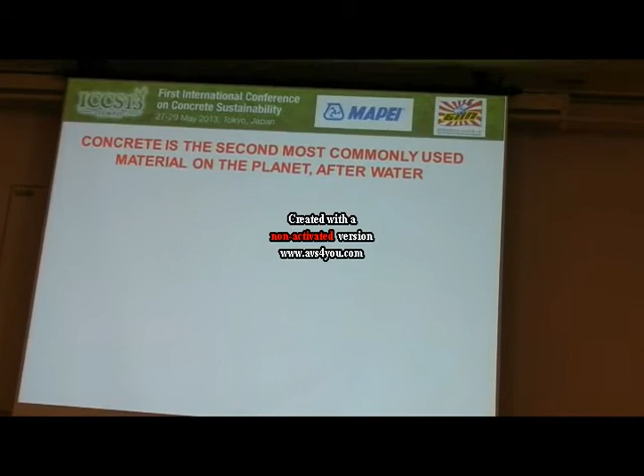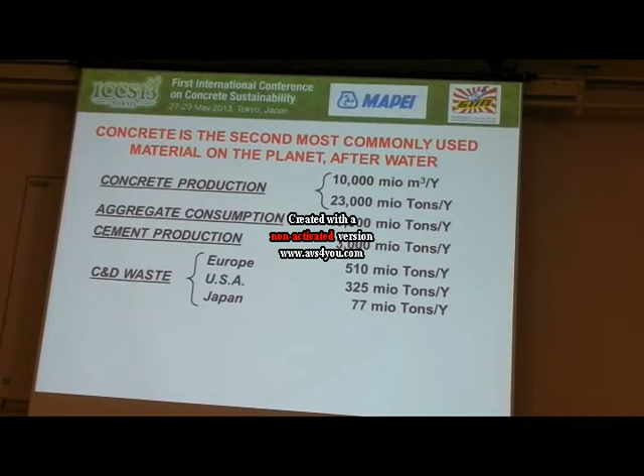Concrete is the second most commonly used material on the planet after water, and the production of concrete is globally huge. About 10,000 million cubic meters per year of concrete are produced. This means that huge amounts of raw materials are used for aggregate and cement, and also a lot of waste is produced. Among these wastes there is returned concrete.

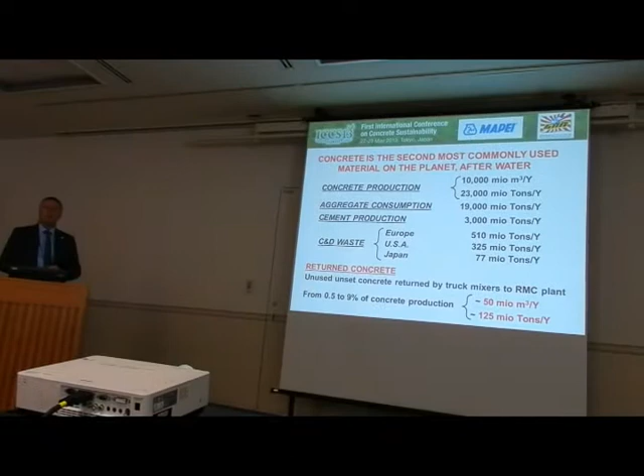Returned concrete is the unset, unused concrete which is returned by the truck mixer from the job site that, for any reason, is not placed and comes back to the ready-mix plant. In many cases this material can be a waste with many impacts from an environmental and economical point of view.

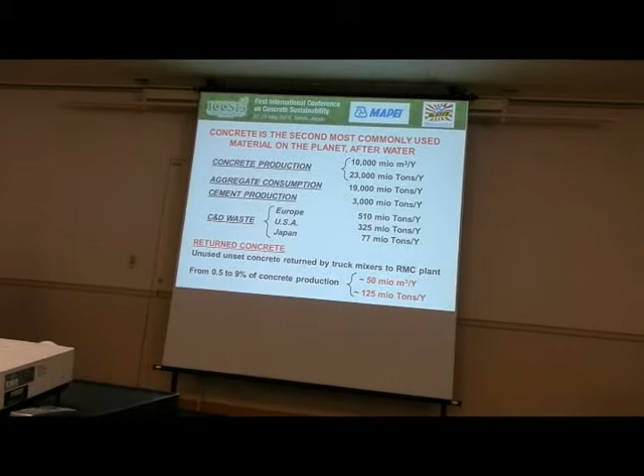In a conservative estimation, the global amount of returned concrete is above 100 million tons per year. That means more than double the amount of the total concrete production in Italy.

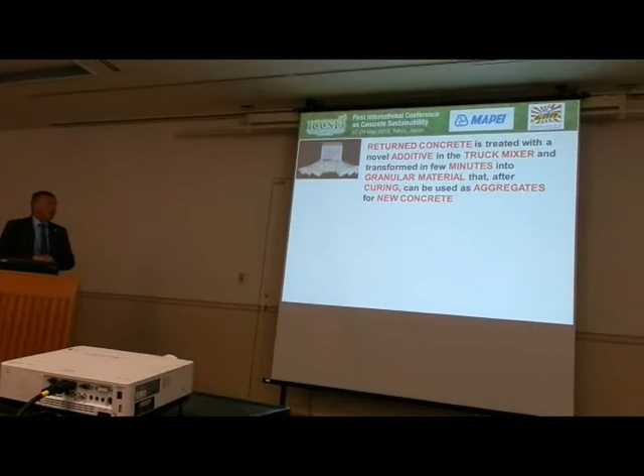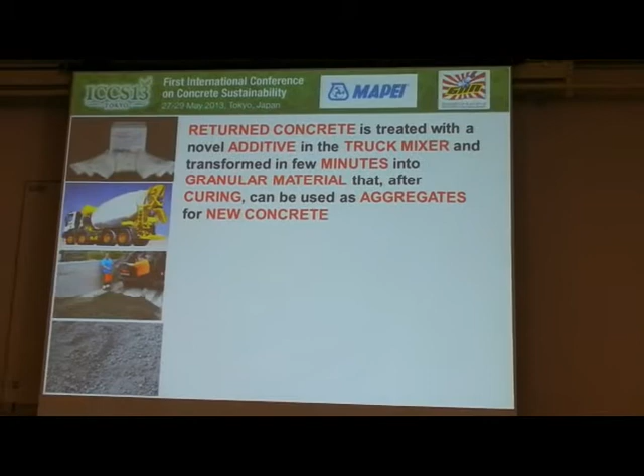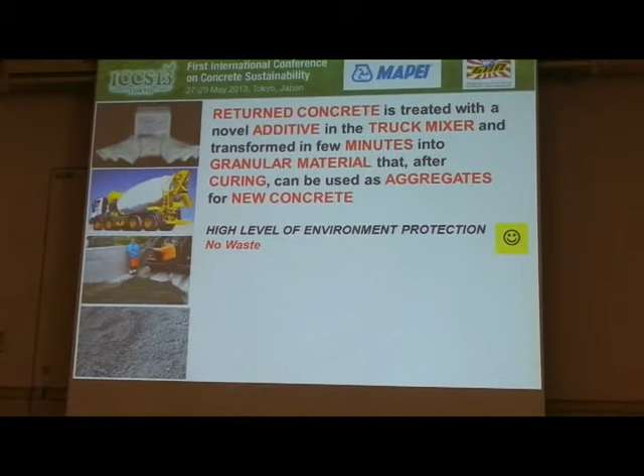With the new technology, returned concrete is treated with a novel additive in the truck mixer, and it is transformed in a few minutes into a granular material that, after curing, can be used as aggregate for the production of new concrete. This technology has many advantages because it's characterized by a high level of environmental protection, because no waste is produced.

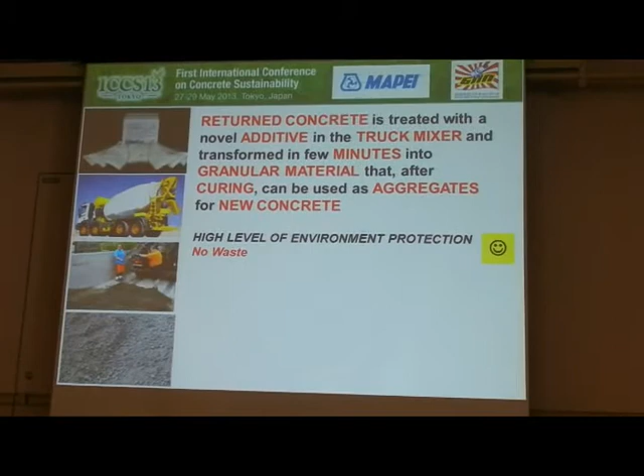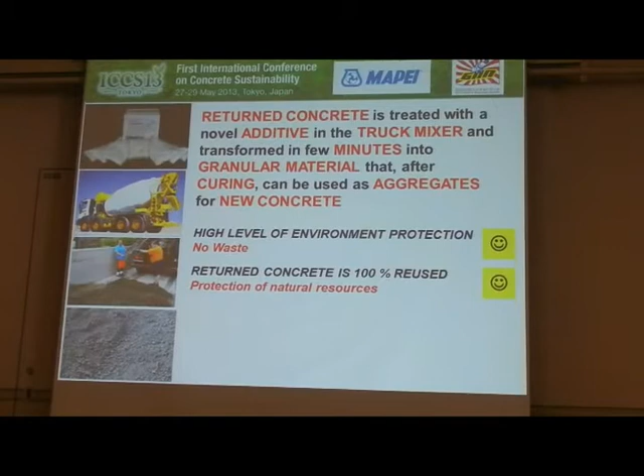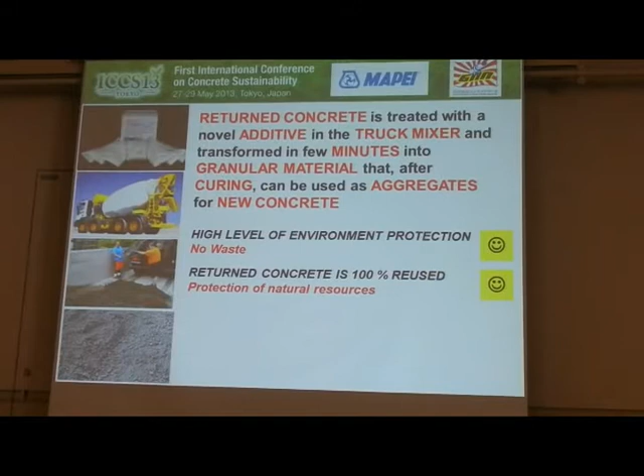The concrete is completely transformed into a new material, so no waste, no liquid, no solid are produced. The second advantage is that returned concrete is fully valued because it's reused 100%, and this allows saving of natural aggregate, so there is a protection of natural resources.

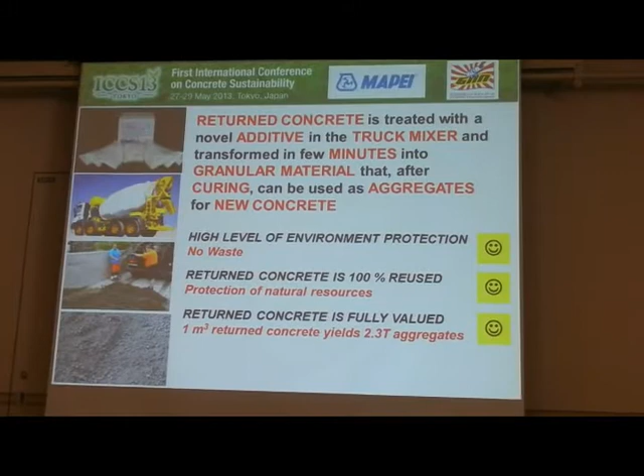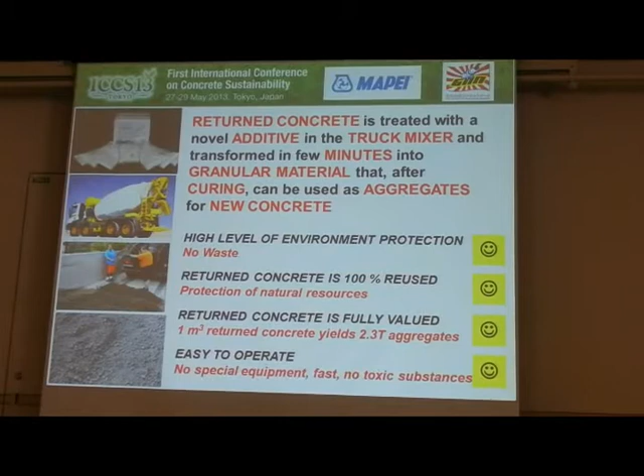From the economical point of view, 1 cubic meter of returned concrete is transformed into aggregate. This means that about 2.3 tons of aggregate are produced from 1 cubic meter of concrete. It's very easy to operate because it doesn't require any special equipment, as the process is operated directly inside the truck mixer, and it's very fast.

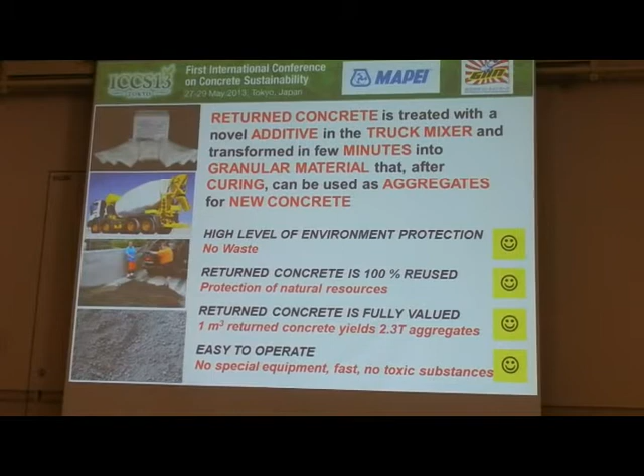The overall process takes less than 10 minutes, and the additives are not based on dangerous substances or toxic chemicals.

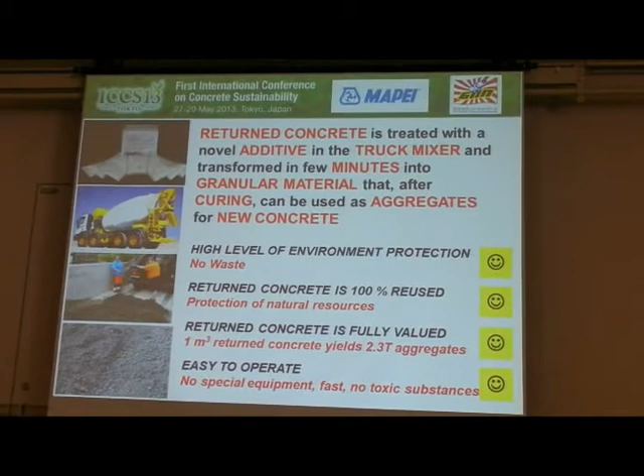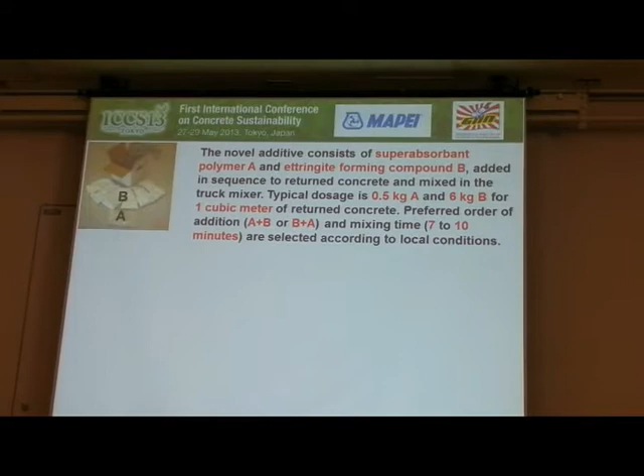The novel additive consists of a superabsorbent polymer, part A, which is in a water-soluble bag, and a component B, which is an ettringite-forming compound, that are added in sequence to returned concrete directly in the truck mixer and mixed together. The typical dosage is 0.5 kilogram of part A and 6 kilograms of part B per 1 cubic meter of returned concrete to be treated.

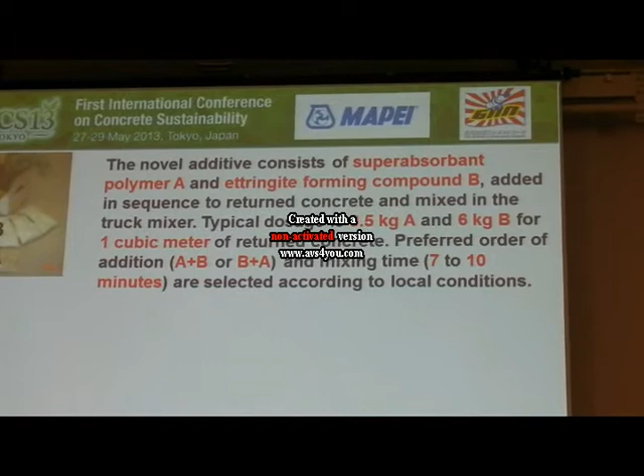The preferred order of addition may be first part A and then part B, or vice versa, first part B and then part A, according to local conditions. This means the type of cement, the water to cement ratio, and other variables.

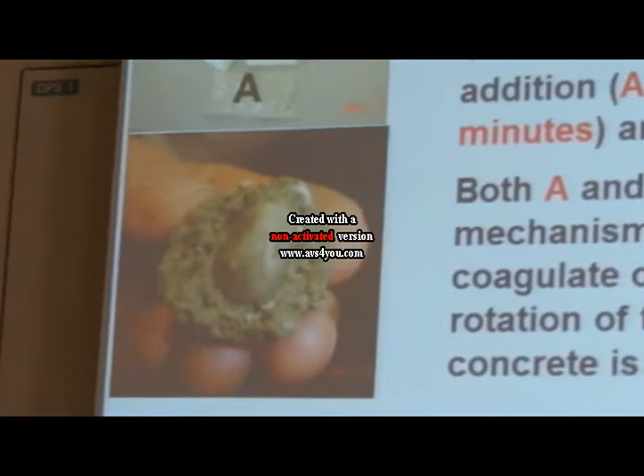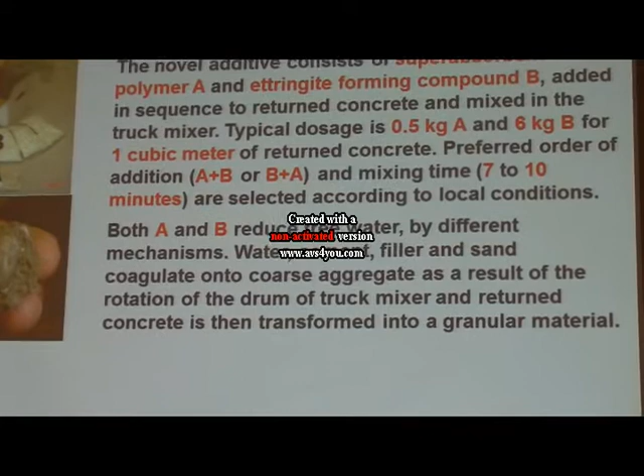Both component A and B act to reduce the free water, so they have the capability to absorb or consume free water, and they act by different mechanisms. The water, cement, filler, all the fine particles of the concrete coagulate onto the coarse aggregate as a result of the rotation of the drum of the truck mixer.

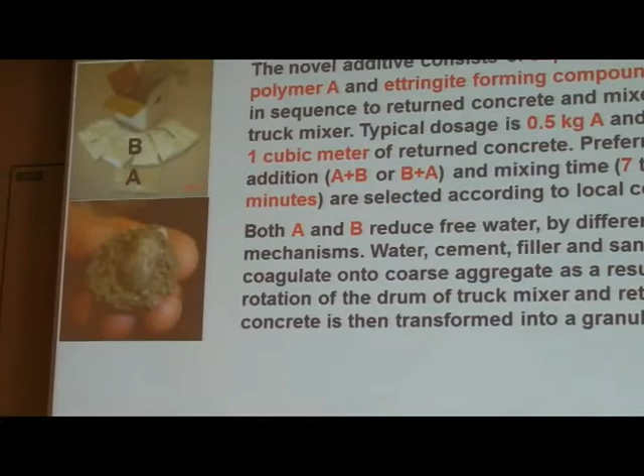Consequently, the returned concrete is transformed into granular material, like this example. You see there is the coarse aggregate inside as a core, and around it there is all the fine material, including water and cement, coagulated onto it.

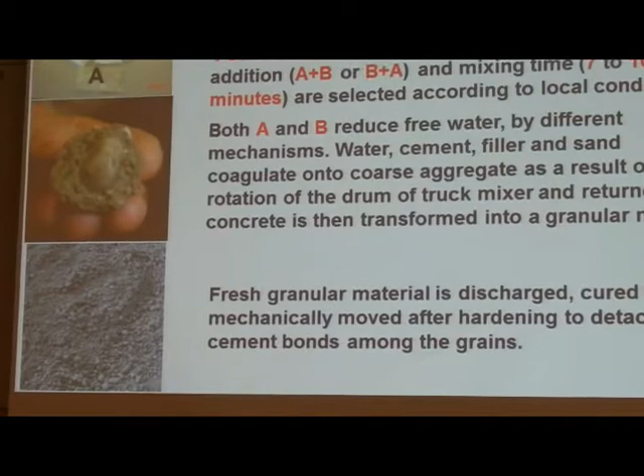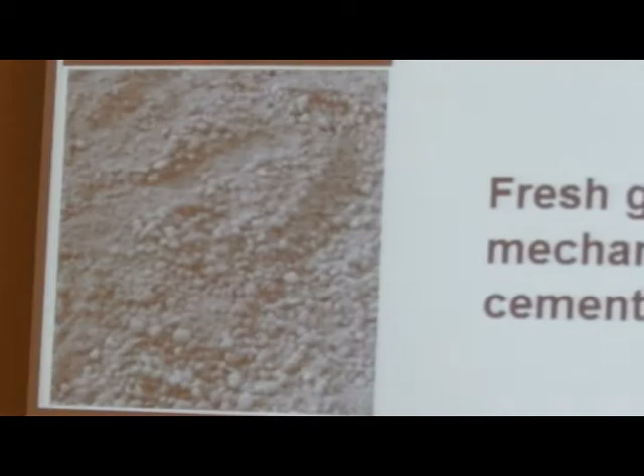After that, the material is discharged on the ground and let to harden as a normal cementitious material. The day after, it is gently moved by an excavator in order to detach the individual grains, giving again the final aggregate.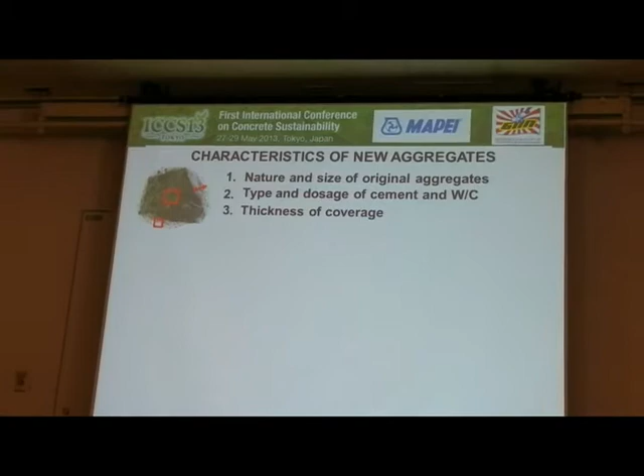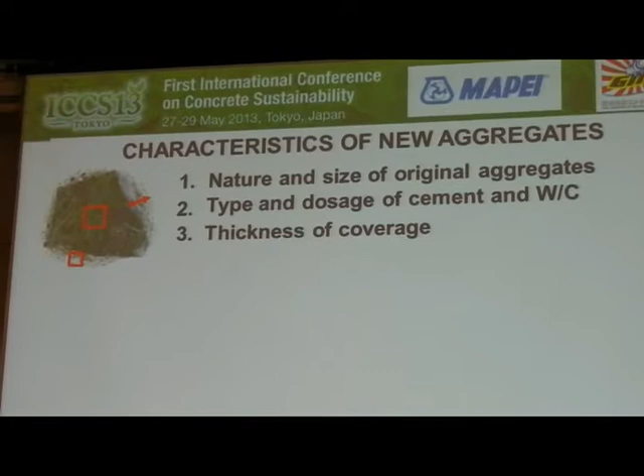Once the aggregates are obtained, they can be reused after some days for the production of new concrete. Of course, the characteristics of the new aggregate depend on the nature and size of the original aggregates, the type and dosage of cement, the water to cement ratio, and the thickness of the coverage.

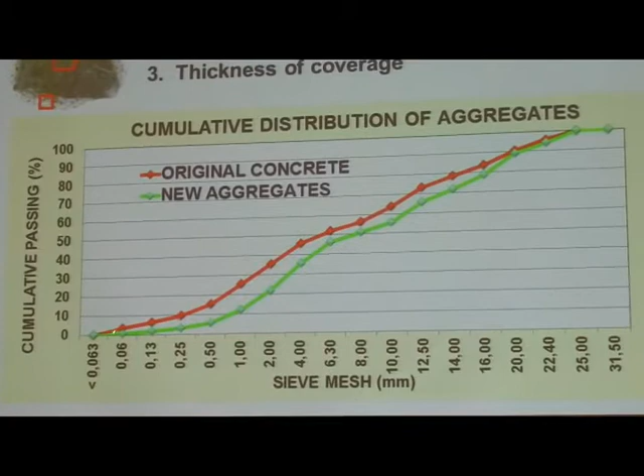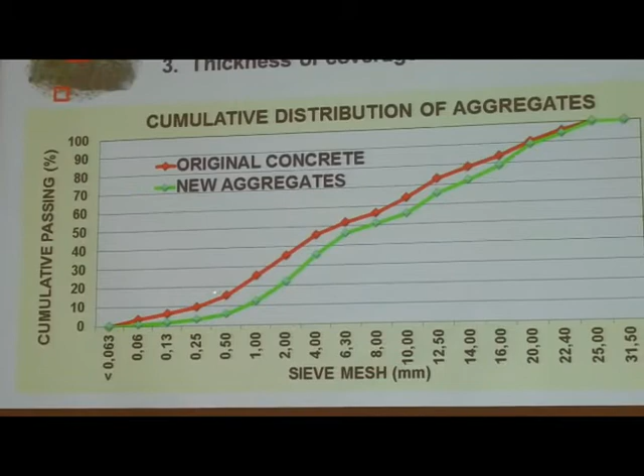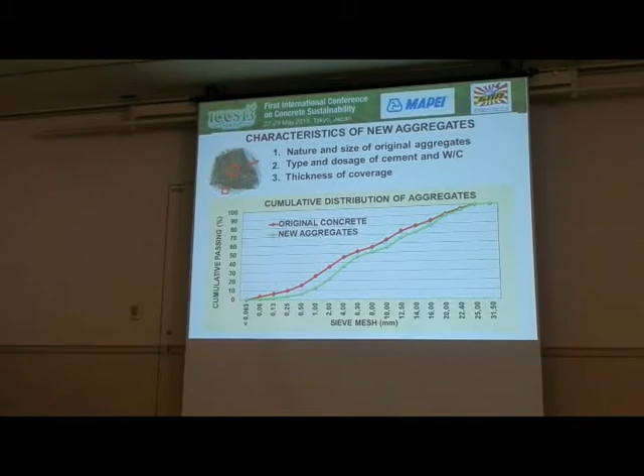The typical distribution of the new aggregate is represented in this graph. This is the original distribution curve of the aggregate in the returned concrete, and this is the typical distribution of the aggregate obtained from returned concrete after the treatment. You see that you have a lower fraction of fine material, because the fine material coagulates onto the coarse aggregate, so you have a lower amount of the fine fraction.

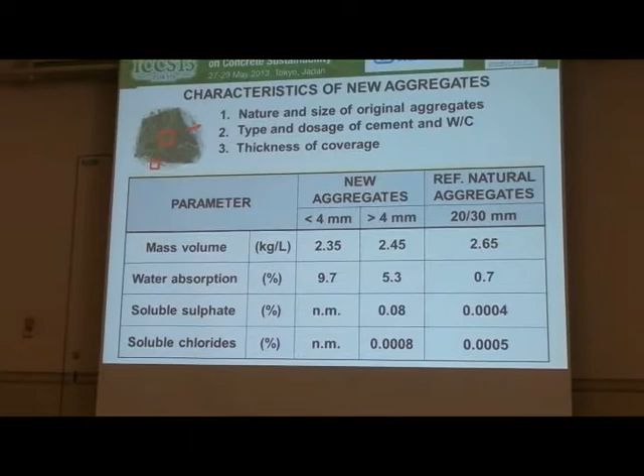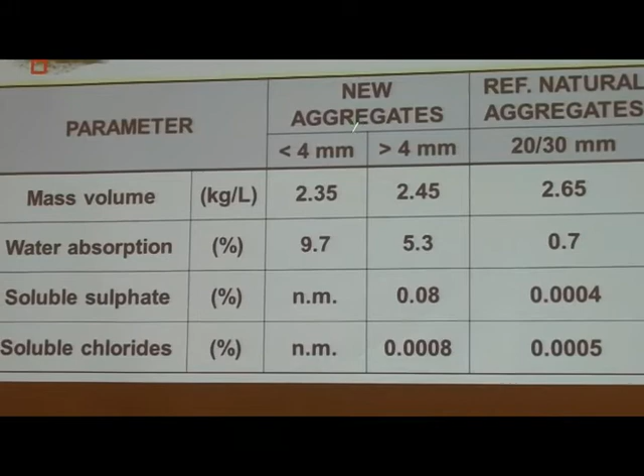Other physical and chemical characteristics of the new aggregate are a lower density, of course, because it's very similar to typical recycled aggregates, and higher water absorption. This is, of course, a function of the particle size.

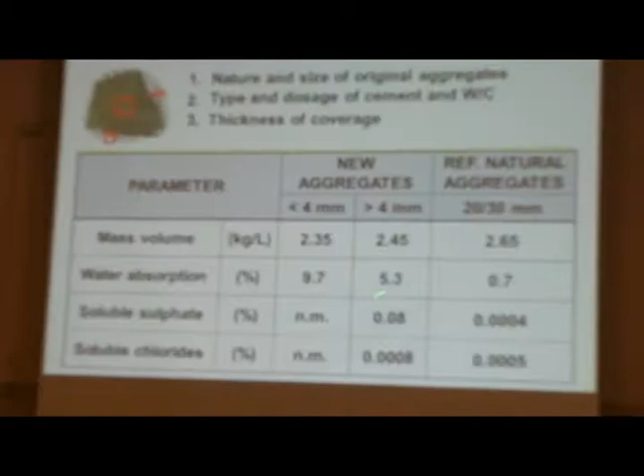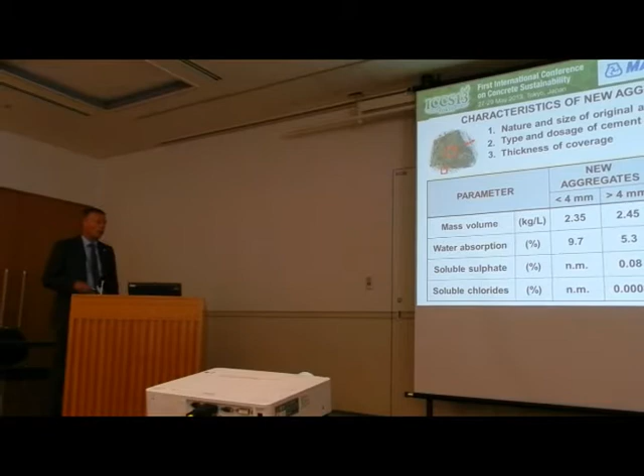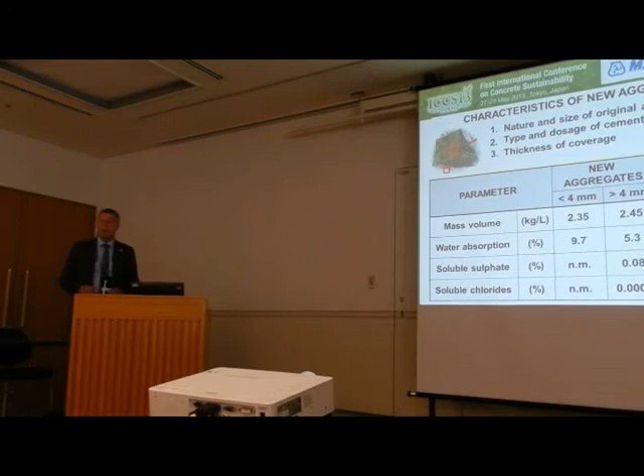Component B is based on sulfate, so the typical level of sulfate is increased compared to a natural aggregate, which has very low content of sulfate. By the way, the increase of sulfate content is not so high, and it is still quite below the technical standard, for instance as stated by the European technical standard. There is no increase of other components such as chloride.

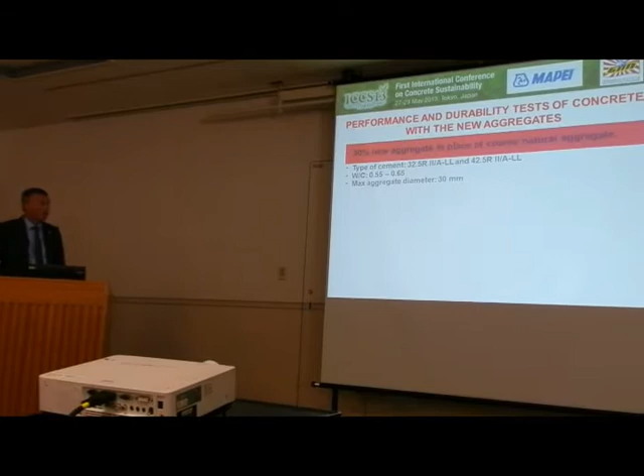What are the performance of the concrete made by using these aggregates? We made tests by substituting 30% of new aggregate in place of coarse natural aggregate. We used different Portland cement, from 32.5 to 42.5, and different water to cement ratios according to the test we did. In all the concrete, the maximum aggregate diameter was 30 millimeters.

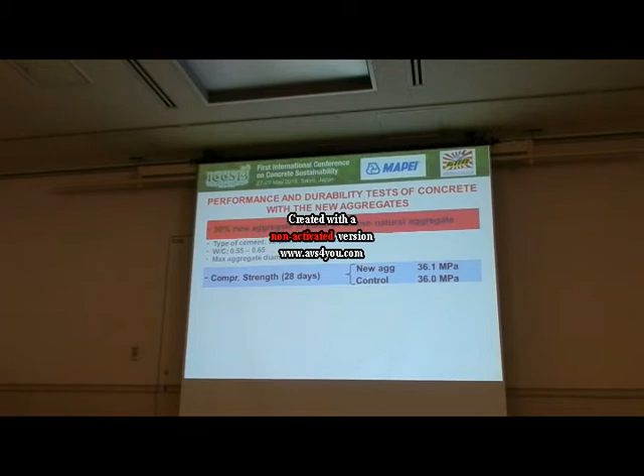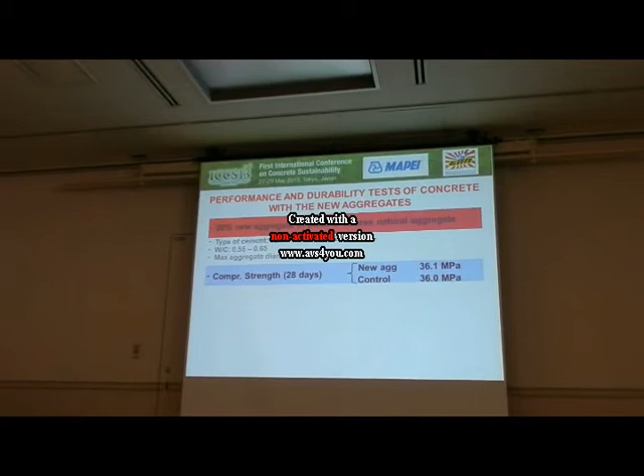We can see that there is no effect on compressive strength comparing the concrete made with 30% substitution of new aggregate in place of natural one, compared to the control. Control was a similar concrete but made with 100% natural aggregate.

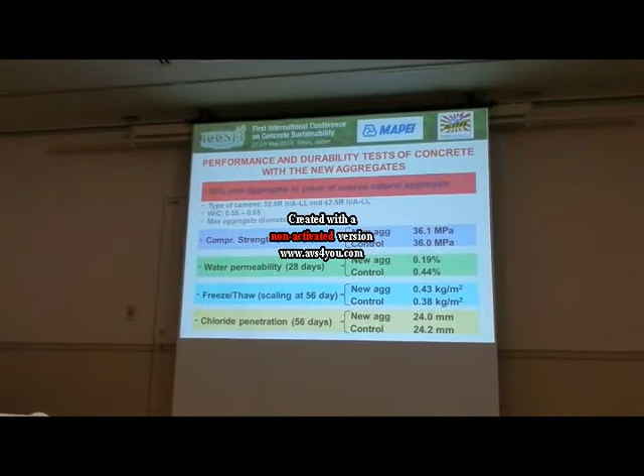Durability tests were also good. Particularly, water permeability was even better than the control concrete with natural aggregate. We are investigating deeply the reasons for this, and also the frost resistance was good, and chloride penetration too.

Now I leave the floor to Mr. Miyamoto, who continues the presentation about the application of the technology in Japan.

Good afternoon, ladies and gentlemen. My name is Mitsuya Miyamoto. I have the honor to represent GNN, a Japanese association of ready-mix concrete producers with over 45 RMC factories distributed all over Japan. The mission of GNN is improving concrete quality and sustainability through innovation, using new technologies and increasing recycling of materials.

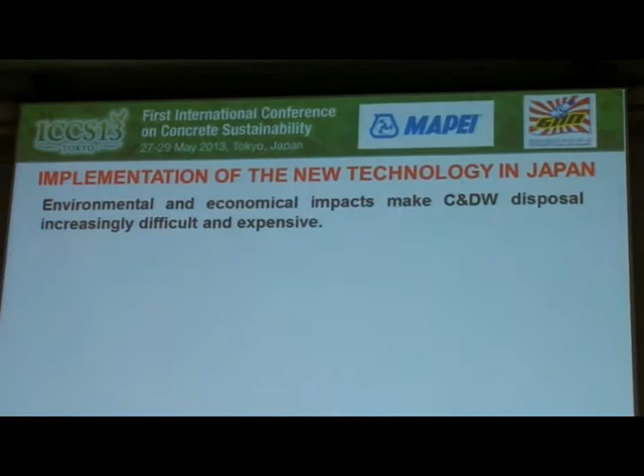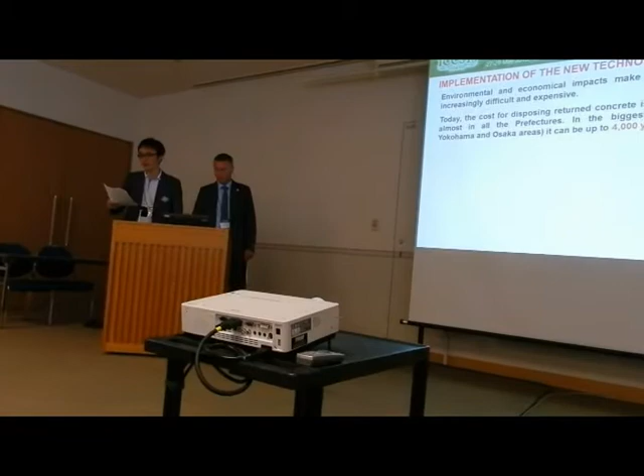Today, the disposal of construction and demolition waste is becoming increasingly difficult and expensive. In Japan, the cost for disposing returned concrete is quite high in almost all the prefectures. In the biggest cities like Tokyo, Osaka, and Yokohama, it can be up to 4,000 yen per cubic meter, equivalent to 30 euros per cubic meter.

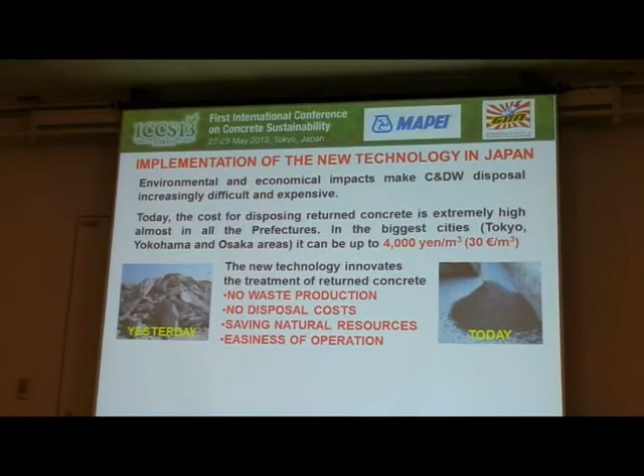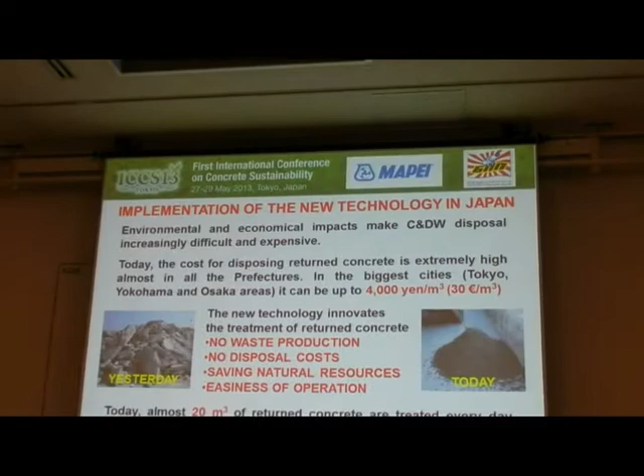We started last year a co-research project to implement the new technology for returned concrete in Japan. This technology represents a revolution compared to the past because it does not produce waste, cuts the cost of disposal, contributes to preserving natural resources, and it is very easy and safe to apply.

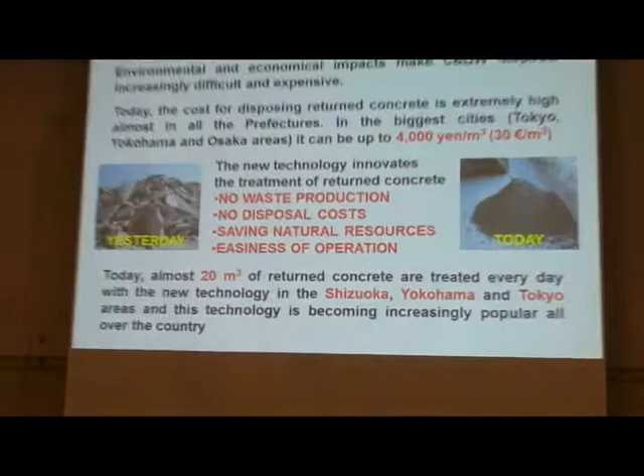Today, almost 20 cubic meters of returned concrete are treated every day with the new technology in the Shizuoka, Yokohama, and Tokyo areas, and its use is becoming increasingly popular all over Japan. It is soon really going to take off.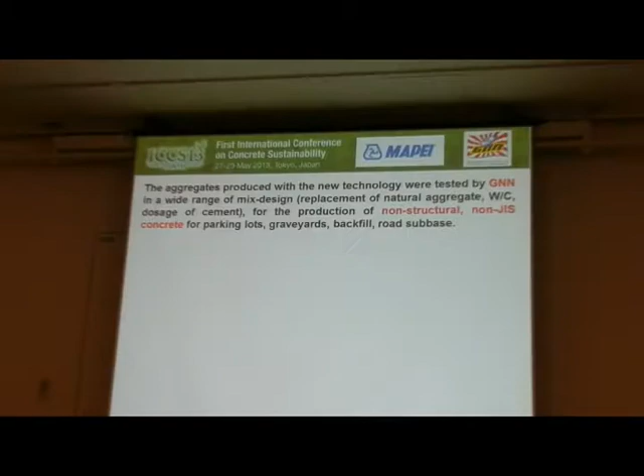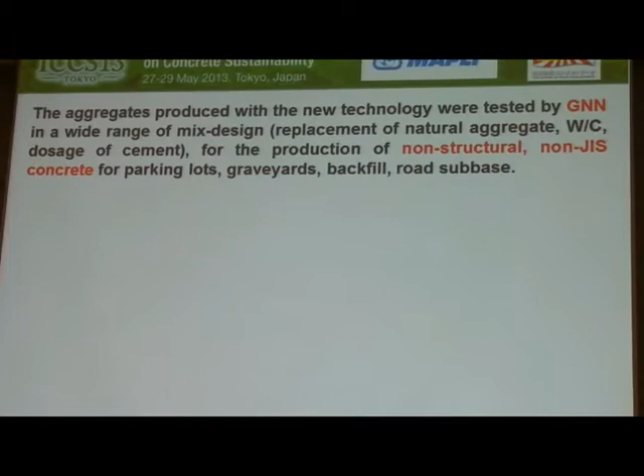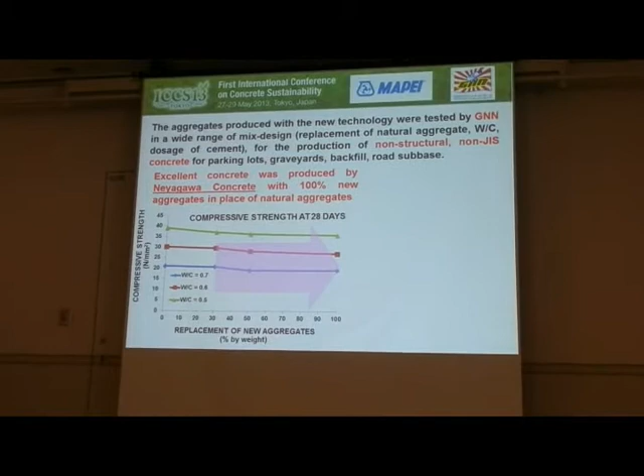The aggregates produced by the new technology have been tested by GNN in a wide range of conditions, for the production of non-structural, non-JIS concrete to be used in parking lots, graveyards, backfill, and road subbase. We, together with other GNN members, discovered that it was possible to obtain excellent performing concrete by using 100% of the new aggregates in place of the natural one.

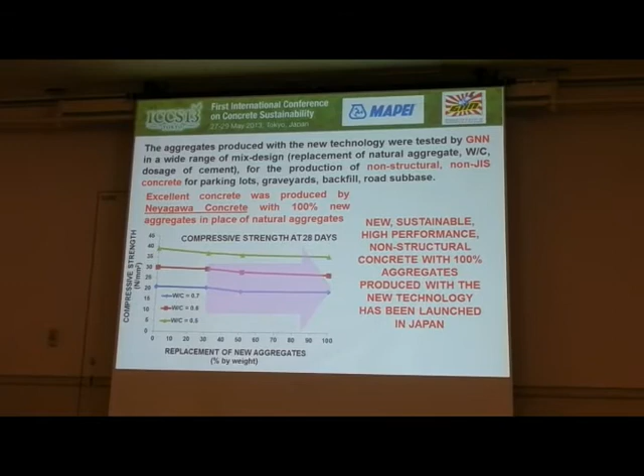After this discovery, a new sustainable, high-performance, non-structural concrete material with 100% new aggregates was launched in Japan. In the next slide, I will show you some examples.

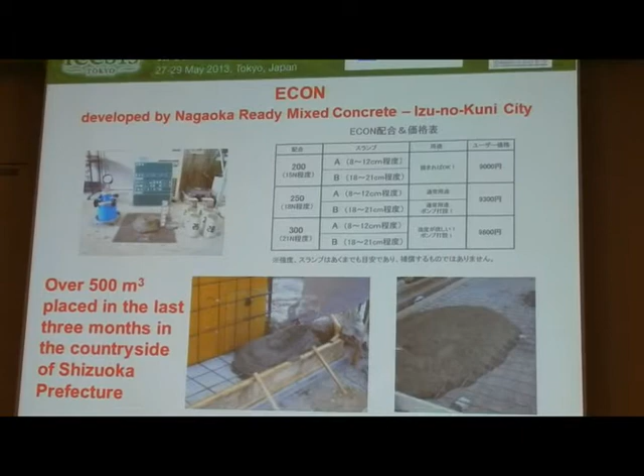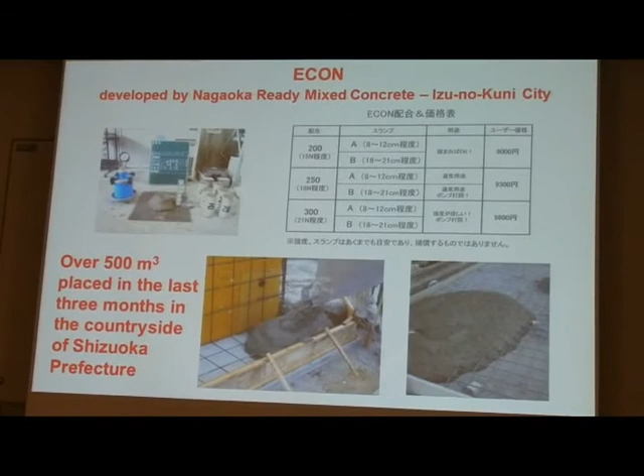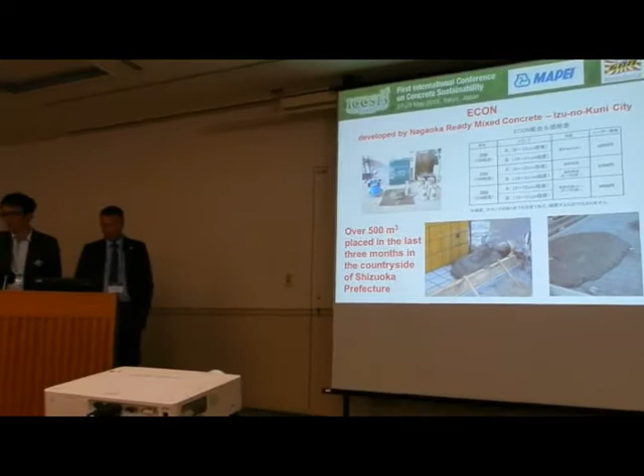Econ is a new concrete material based on 100% aggregates produced with the new technology. It has been developed by Nagaoka Ready Mixed Concrete, and it is available in 6 different types according to the class of strength and workability. Besides the excellent performance of Econ, thanks to its cheaper price, general contractors can save more than 30% cost compared to concrete produced with natural aggregates.

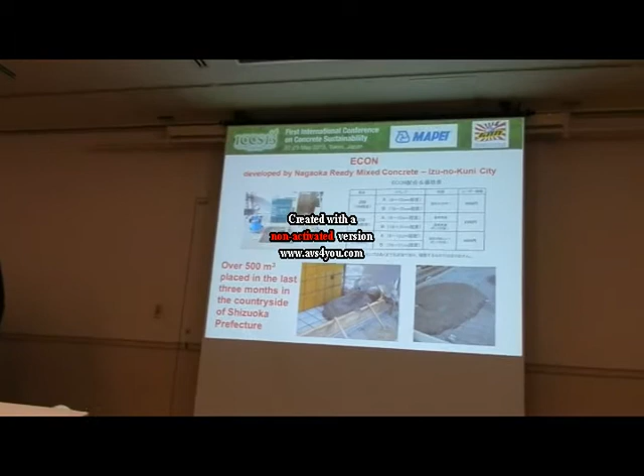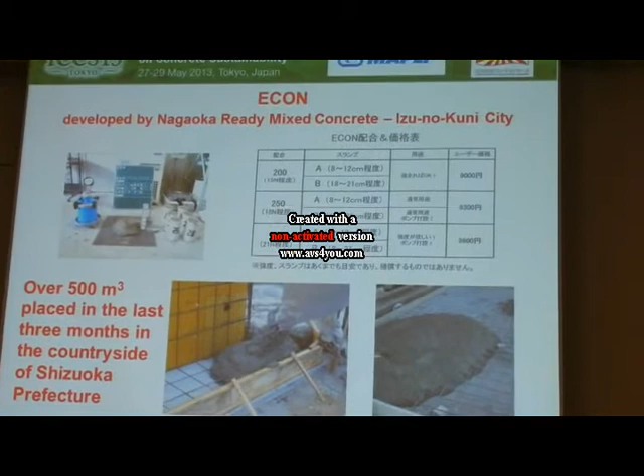For this reason, Econ is becoming increasingly popular in the Shizuoka area, and over 500 cubic meters have been placed in less than 3 months. Now we are placing Econ at more than 200 cubic meters a month.

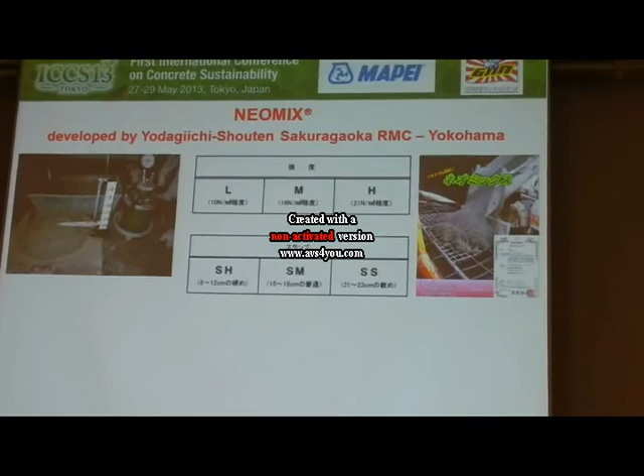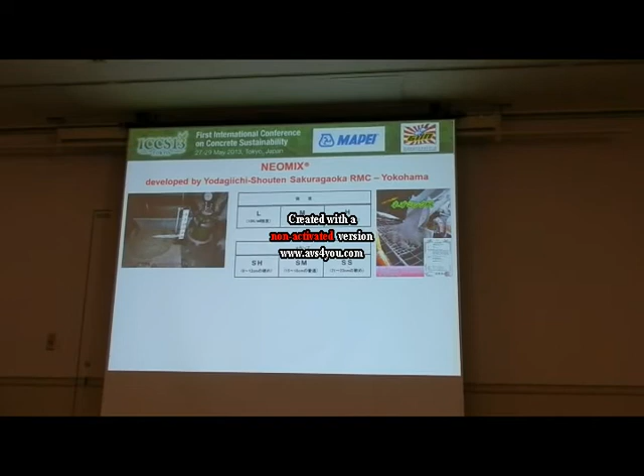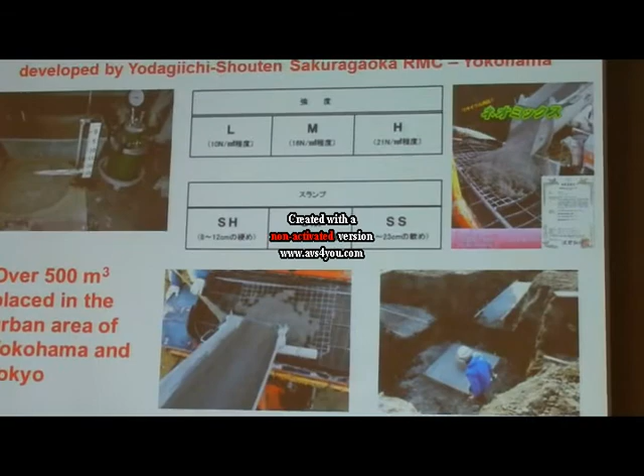Thanks to excellent performance and cheap price, Neomix is increasingly being used in the Yokohama and Tokyo area, and over 500 cubic meters have already been placed. Thanks to these two examples, Econ and Neomix, we don't dispose of returned concrete anymore. Actually, we want more - please give us returned concrete.

So we finished with just 2 slides of conclusion, but I think we have explained quite well the fundamentals of the application of the technology.